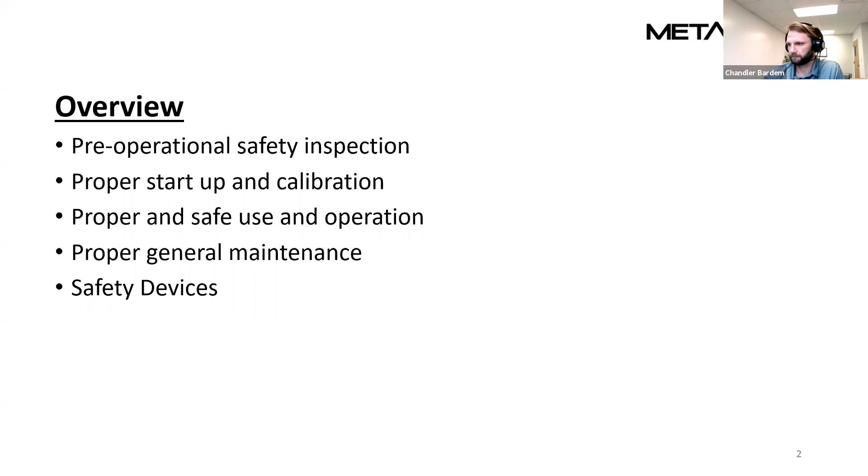Okay, so folding area precautions. Before or when you're installing, or when you're starting to train, and at the beginning of each day, you want to take a look at the folding area or the general area around the machine.

We always want to make sure that the control itself is in a good area for both the operation of the machine, the manipulation of material, and safely operating, so the operator can safely reach the control. Most OEMs that I know of restrict where the control can go, so it cannot collide with the moving axis of the machine. That said, there are ways that operators can loosen different bolts or set screws to move the control. If you ever see that they've moved it into a new position, always just double check that it's reachable for the operator, especially if the control has a safety stop on it.

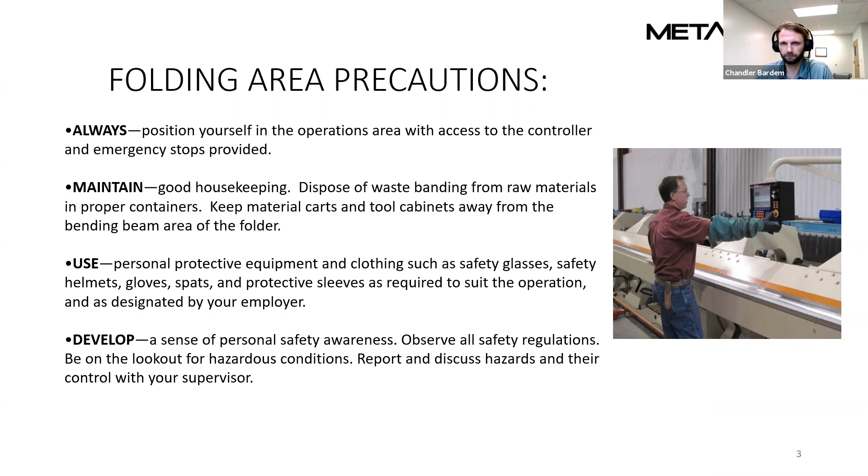You'll see many times that customers store material on the upper beam. It really won't damage the machine, well, I can't speak for all OEMs, but it won't damage a machine. But it's not good practice, because when you store a bunch of blanks up there, it can be more efficient when an operator's just reaching up and sliding the material down. But if they were to accidentally grab more than one, or whatever mounting system that's connecting it to the machine were to break, when those sheets fall, they're coming down more or less like razor blades coming down to the person's legs or feet or arms, depending on where his or her location is at the time. I think it's real important to point that out. I understand the advantages of it, but it is a risk.

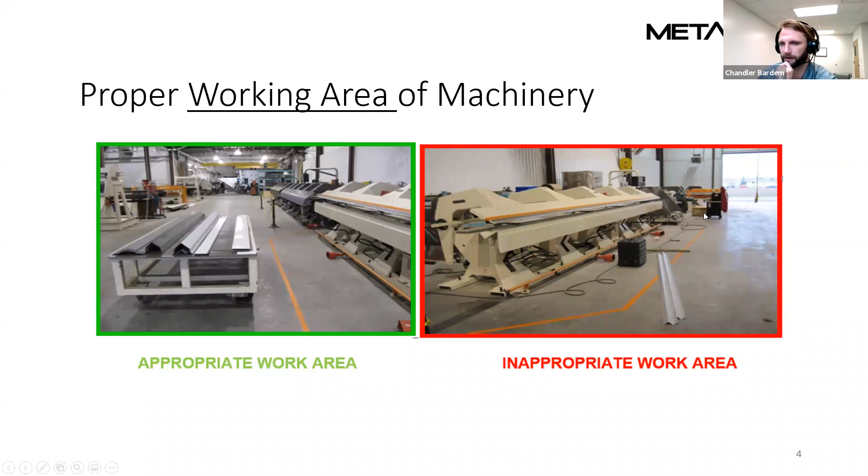So this is kind of the same topics that I just talked about. A couple more to add on this slide: often I get the question, how close to the wall should I put the machine? It really depends on the type of machine, but any machine you purchase, even if it can go up against the wall, you need to have at least 3 or 4 feet away from the wall for maintenance. Our techs have gone to many facilities where somebody buys a machine and slams it right up against the wall. And then if they need to get back to the rear of the machine to do any type of maintenance or service work, they can't get there. They have to end up crawling under the machine. It's just much more difficult, and draws out any type of maintenance PM work that you might be doing in-house.

Clear danger zones. I'll talk a little bit about a 10-foot side frame or a 10 or 13-foot side frame folder here in a minute. But the clear danger zones is any moving axis should not have any material, banding, or anything on it that can fall and injure the operator or the machine itself.

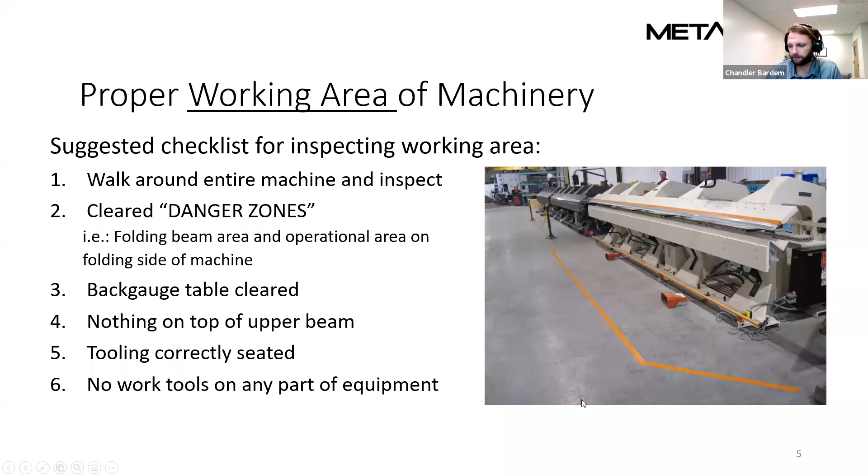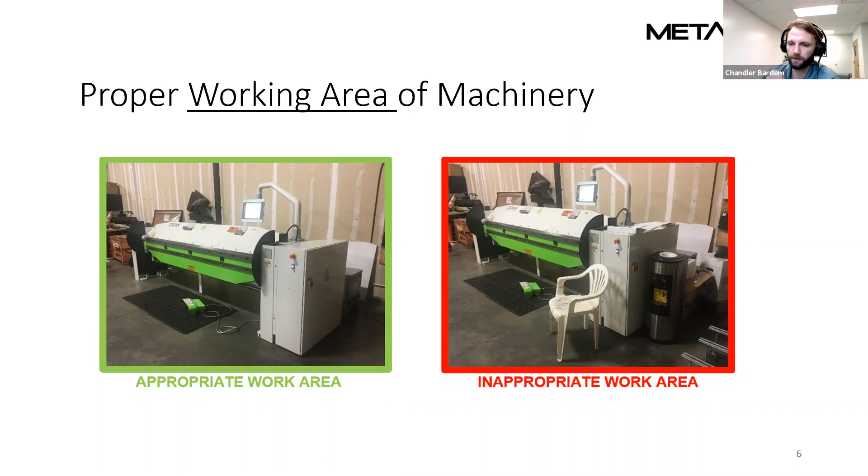If that back gauge moves back and grabs material, it's going to shove it forward onto the operator working this machine. You also want to think about what kind of binding it's going to do. It can grab material and pull it forward if the circumstance is right with the programming, or push it toward the operator when he or she isn't ready. Also, if you stack more and more material up there, some machines don't have support legs on the back gauge. That's fine for normal use, but if you've stacked a lot of material on there, it can cause damage to the machine. So you want to be aware of that as well.

When we talk about PPE: ear protection, safety glasses, protective sleeves, safety boots, steel-toed shoes, and ear protection if necessary. With newer technology, even the hydraulic long folders are getting to be frequency-driven hydraulic pumps where they're not constantly on, they're on-off, so you're not hearing that constant humming.

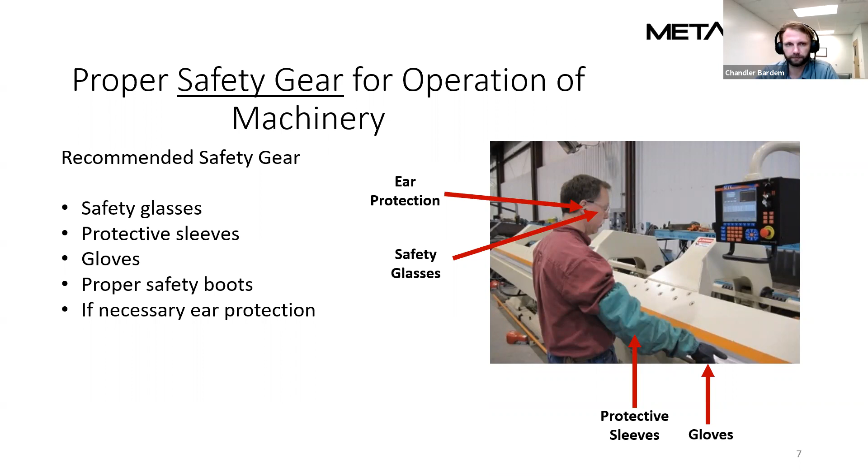Okay, so now we're going to go to the proper startup of the machine. So now we've covered our area around the folding machine being clean. Our danger zones are okay. Now we need to turn on the machine.

Now, every OEM process is going to be different. This is talking about a general process - I worked with Bradbury on covering this or creating this document, and we covered our machines and said, okay, these are general topics. Please refer to your OEM manual to verify these different procedures and processes, but this is generally what we need to do: turn on the main power switch, disconnect at the MCE.

This is important. Obviously we're just turning on the power, but more importantly, don't leave the machine on when you power it, or when you're done for the day or for a shift. Have a procedure for the team on when the machine needs to be powered off, and what needs to happen when it's powered off, like if the upper beam needs to be clamped or not. On certain machines, specifically hydraulic machines, you're supposed to clamp the upper beam. Not all machines out there, but certain machines you do. That's to prevent a slow drift of the upper beam over time.

Verify after you turn the machine on that all emergency stop buttons at the operator station are pulled out or in the safe position. What I do when I start a machine is walk around and make sure they're all pulled out, because before I turn off a machine, I hit the emergency stop. That's not required by any OEM - it's just kind of a habit I have.

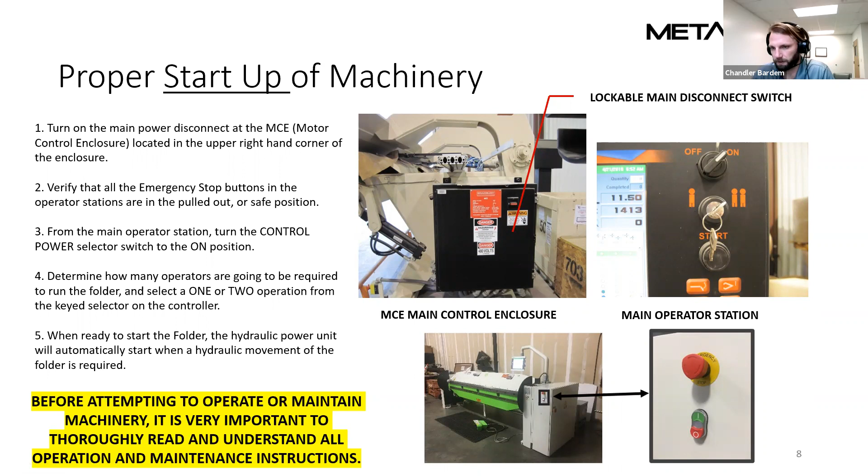Okay, so the function of the main operator switch. On long folders, you're going to have two operator switches or foot pedal switches. That's because a lot of people operate them with two people. So you're going to want to have somebody who's actually controlling which axis is moving, and then a second operator who has to be active on the pedal to say, hey, I'm here and I'm paying attention. So the main operator pedal - this whole pedal unit has two pedals, the left and the right. The first position is the clamp.

The second position is, well, it depends on your OEM, but the second position can either be to fold or to raise the beam. Most foot pedals these days are going to be two-stage foot pedals. If you press hard on the foot pedal, you're going to click through the regular active state, and you're going to go to a reverse active state. So the clamp pedal, when you're coming down and you're in the standard active state, and then you step through to go to the reverse, it's going to actually raise up the upper beam.

That's because if somebody gets in a situation where they see something that they don't like, people could tend to tense up, and they might not take their foot off that pedal in time. So they'll step through that second stage, and the beam will automatically raise up. It's not going to throw an error for you, it's just going to reverse the action. If that upper beam is raising up, you're not going to hurt anything.

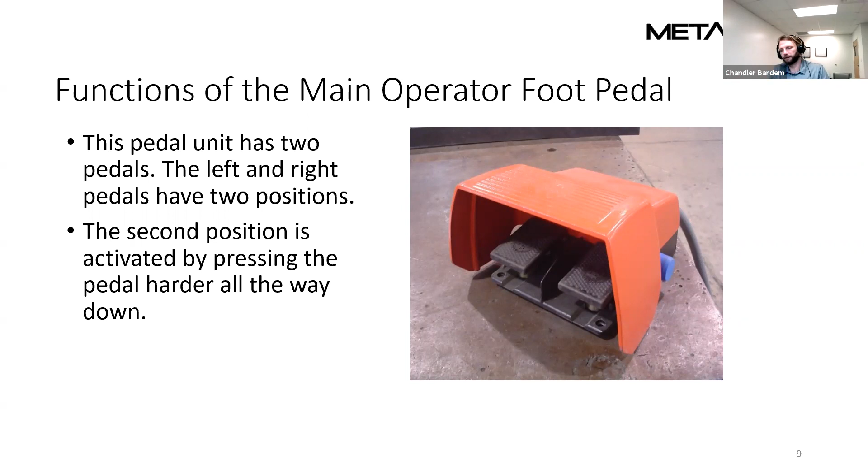It's just going through more detail on the positions. Again, refer to your OEM on this. It is very important when you look at each OEM and what their foot pedals do. I cannot speak for all OEMs out there.

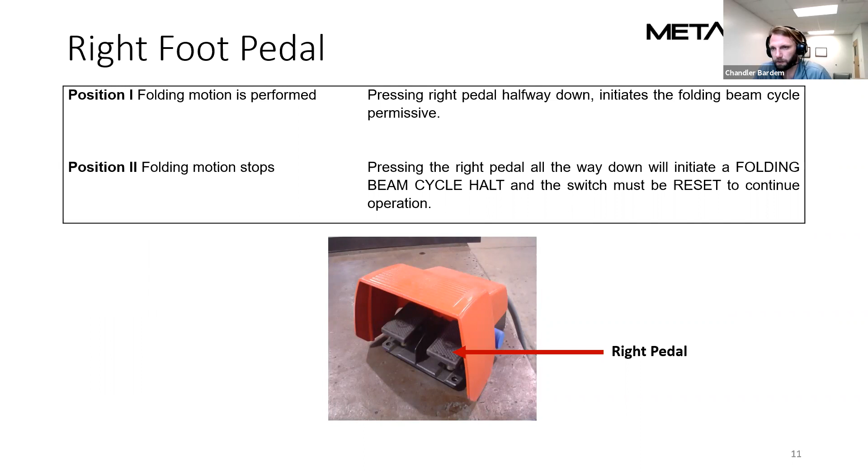So, second operator foot pedal. The control has to be in a two operator mode. Sometimes that's a simple key switch like this. Sometimes it's a little checkbox on the touch screen. Depends on who made your machine and probably what year it is as well. A lot of people say for parts that are over 10 feet, you're going to use two operators. That's up to the discretion of the company.

There's no type of OSHA requirement on that. What I would say is look at the parts you're making and understand the manipulation of the parts, if it's a single fold or a double fold machine. If it's a long piece and you're doing a lot of flips, it's going to be better for your operators. They're going to be safer. They're not going to get as worn out by manipulating these parts all day,

and they're going to be more efficient with operating. Granted, you are having two guys on the machine, but how many damaged or inaccurate parts cover adding another person to the operation? Anyways, deciding one or two is all company specific. Anytime a second operator is utilized, the primary operator should get the confirmation audibly or visually from that operator.

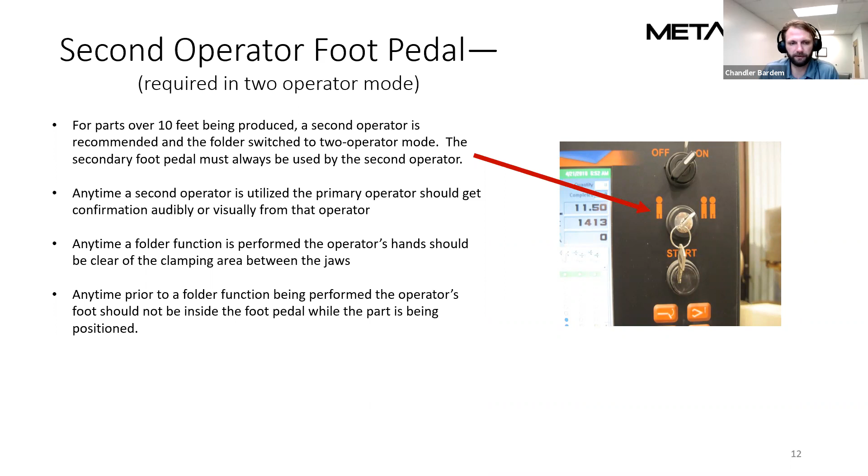Okay, anytime we talk about keeping your hands away from the jaw, that's really any time with any amount of operators. But what I want to talk about here is how the second operator switch is active or can be active. So again, the main operator is the master, and then this is the helper. So when the helper says, okay, I'm good to go, whether that's visually or audibly, the helper can press down

on his pedal. There's going to be an operator sync time within which the master pedal has to be pushed to activate the machine. It could be different with different OEMs. Honestly, I have no idea. But generally it's within a few seconds, 3-4 seconds, that once the helper operator says, okay, I'm in a safe position, I'm ready for you to control the machine, the main operator then can control the machine. If that operator sync time has expired, then the machine will not move. They have to go through the sequence again.

It seems like a quick amount of time, but actually seeing operators do this, it's very efficient. They can kind of just work off each other, give nods to each other, and then they're working away. Now, the helper operator does have to know when he says okay, he can't adjust anything. When you have an operator who is used to working a machine on his own, he might, during the clamp process, adjust the material or make sure it's against the backstop again.

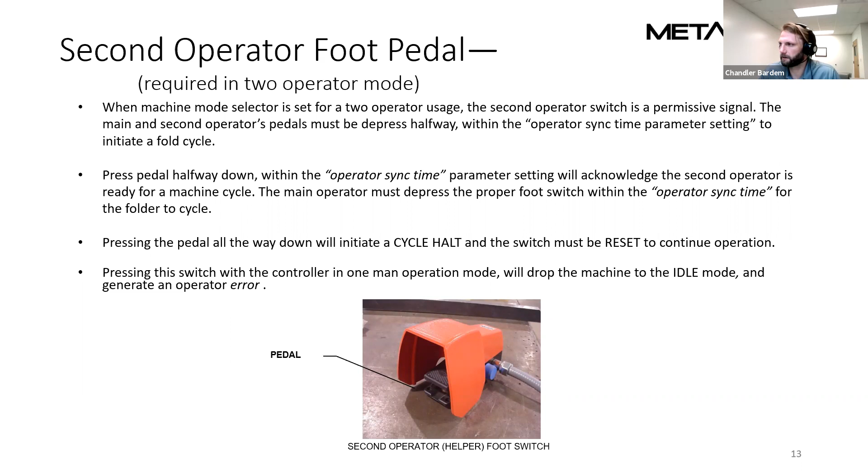When we're operating the machine, we want to check that all the tools and rails are secured properly. Again, on long folders, that's not so much of an issue. You need to think about your folding beams. Generally, machines come with a thicker folding beam to bend thicker material. If that is put on for whatever reason, you want to make sure that that's seated in there nice and tight and secure to the machine.

Set the folding beam to the relevant thickness. That should honestly be reworded because it depends on what type of machine it is. It could say set the folding beam and/or upper beam to the correct material thickness. On long folders, you have to pull the upper jaw back away from the 0 point of the bending and clamping in order to set the material thickness up correctly. That'll all be in your OEM's manual, and your operator should be trained on that.

Honestly, it's not a safety issue with your operator. It's more of a machine issue. You could hurt the machine by not having that set up correctly, especially if it's an older machine. It's not going to have the same type of errors that the newer models do.

Position the sheet between the rails and push against the back gauge. It's pretty obvious. Number 4, let go of the sheet and keep hands away from clamping. I've been guilty of it, but it's amazing how many times you see people who are clamping and their fingers, their hands, their body is way too close to the clamping area.

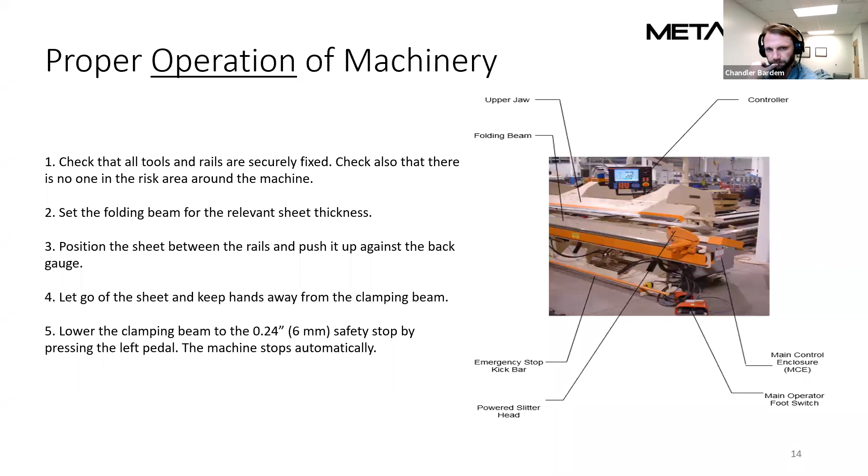Proper operation of the machine. Clamp the sheet by pressing the left foot pedal again. This goes back to OEM. Look at your manuals. I don't need to go through all this. You'll be able to read this, and it's really dependent on the operator. So I'm not going to read exactly from the slide. I just want to talk about this a little bit.

Don't have your hands on the material when you clamp it. Don't follow the folding beam up with material. Don't have your hands on the folding beam as it moves up. Don't have your hands on the material as it moves up. It's the same thing as a press brake.

When you look at injuries on press brakes, a lot of it is because they have to support, especially on heavier material, the material going up, and that material can cause a pinch point between the upper beam and the material. That's obviously very dangerous. You don't want to do that.

But once that material is clamped, with what this industry is doing, we're talking 29 gauge to 24 gauge to, let's say, 16 gauge, the machine's going to hold it fine. It doesn't need help bringing it up. And if for some reason, look at your manual, 90% of machines out there can slow down the bending speed on a specific line so that you're not having to worry about supporting that material up if you have a lot of material outside the machine.

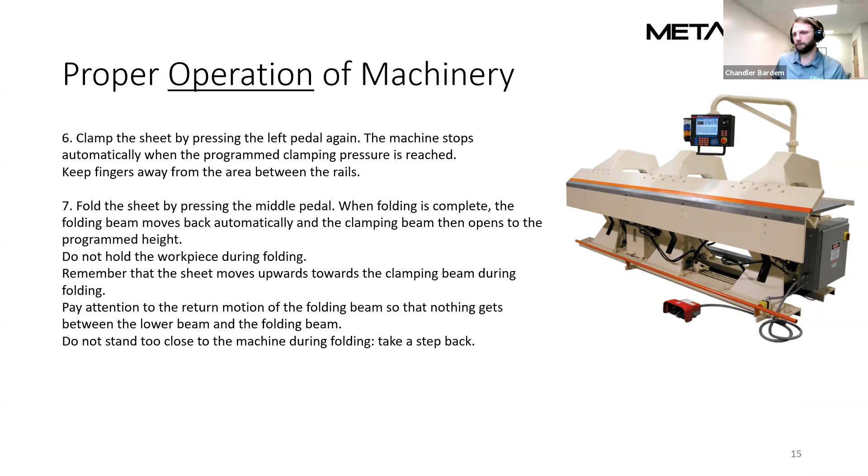Obviously, it's not a foolproof safety device, but having that foot pedal in a general area away from the machine allows the operator to not have to worry about the folding beam coming up and scraping him or her.

General maintenance for the machine. I'm going to run through this fast because it goes back to the OEM and referring to your manual. Safety-wise, power off the machine. It's amazing how many times I've seen people underneath machines or people with covers off and moving axes, and they're not trained to do it, or they're just trying to figure something out, but they're not looking around and understanding what's happening. Obviously, there's some troubleshooting that might need to happen with the machine on, but if you can achieve the goal with the machine off, try to do that.

Next is make sure the safety stops work functionally. Kick bars on long folders. Make sure there's nothing blocking it, and it's still loose where, if the operator kicks it, it's going to activate the safety stops. Safety stops that might be on the side of the machine that isn't used very much, make sure they still work. Just all different safety features, always test them.

Hit all grease fittings, that stuff's in the manual. You guys can read through this, but the other item I would say here is wipe down the machine. I've seen a lot of people who take an air hose, put on a blower and just blow off their machine. All it does is just blow the dust and everything up into the air, and then it's coming right back down. Wipe off the machine.

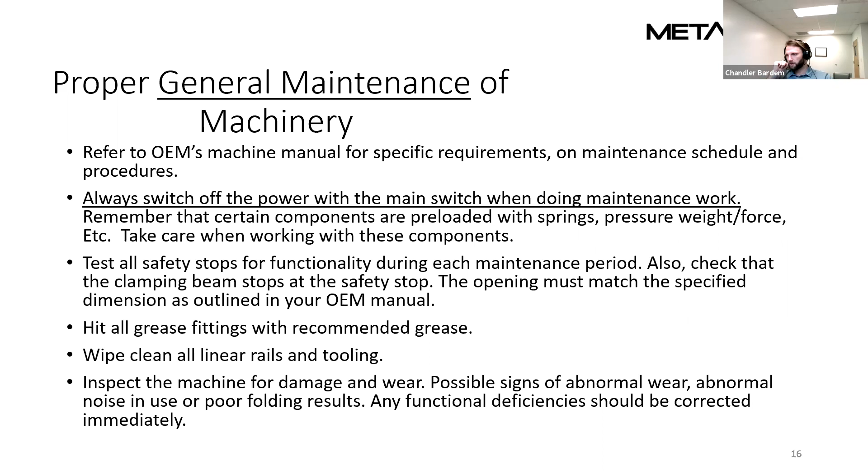Now that's not on all machines, but there's little overrides that you need to understand. The operator really needs to understand. I hate talking about this, but do mock scenarios. Okay, what do you do if somebody's finger gets pinched in the machine? What does the operator do if you're that person? And run through it with each of your operators.